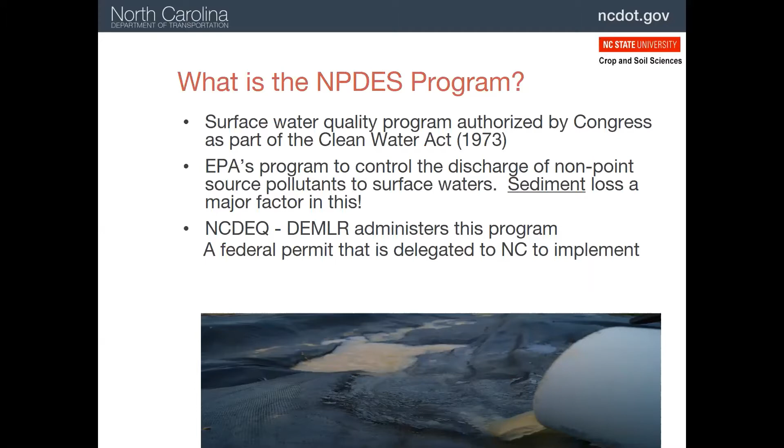The NPDES program is a result of the Clean Water Act of 1973. It directed the U.S. Environmental Protection Agency to control the discharge of pollutants to surface waters, one of which is sediment. This responsibility is given to our Department of Environmental Quality, or DEQ, administered by the Division of Energy, Mining, and Land Resources, or DEMLR.

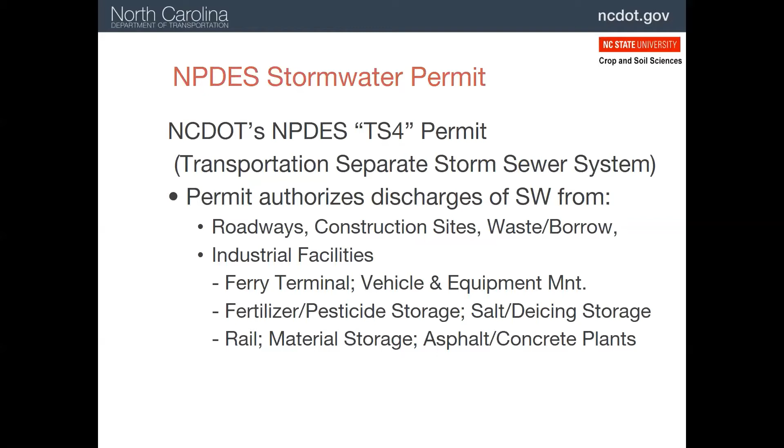The North Carolina Department of Transportation obtains a permit from DEQ that authorizes the discharge of stormwater from all of the following which NCDOT oversees: roadways and their construction, ferries, stored materials, and railroads. This is called the Transportation Separate Storm Sewer System, or TS4. Note, the term sewer is an old one referring to underground pipes, but not necessarily meaning to carry sewage.

The permit requires NCDOT to control potential pollutants through 6 different efforts. One of these is for construction sites, which is the focus of our discussions today.

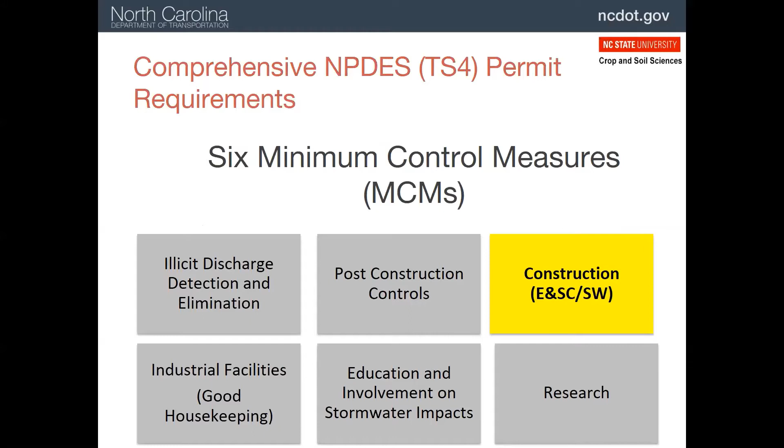There are actually 2 programs that are designed to minimize pollution from construction sites. One is a Construction General Permit, or NCG01, and the other is mandated by the Sedimentation Pollution Control Act, or SPCA. They both are part of the Stormwater Pollution Prevention Plan, often referred to as the SWPPP.

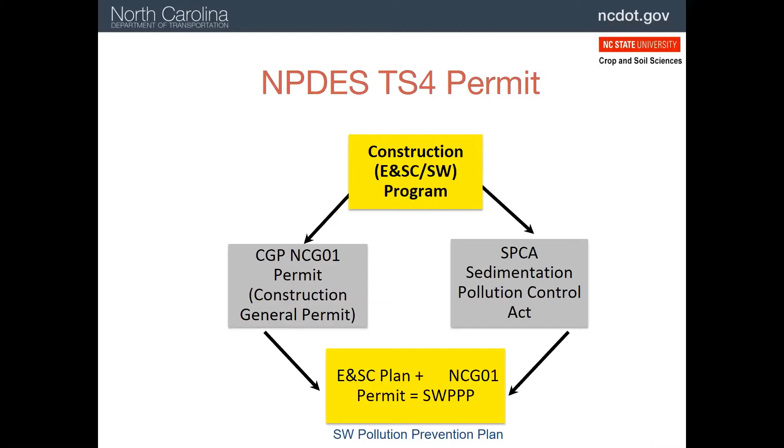There are a number of aspects to the NCG01 permit and the SWPPP, but let's focus on the materials handling and inspections. These are particularly important for Level 2 people.

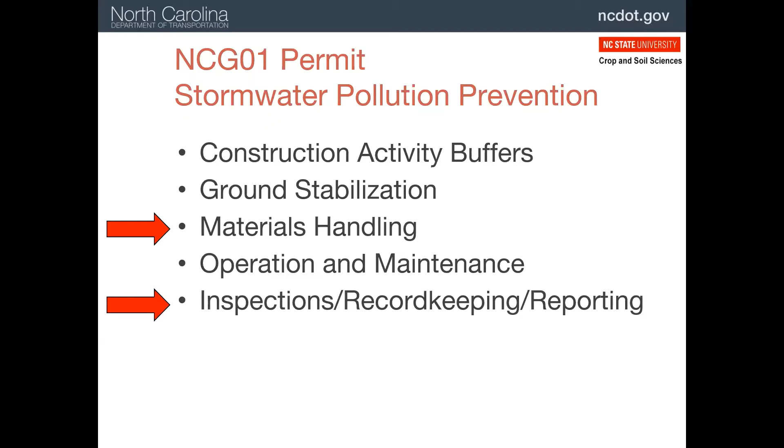Materials is a broad term covering just about everything on the construction site. Remember, we are talking about prevention, or ways to ensure that these do not become pollutants. We'll go through each of these individually.

Flocculants are used to reduce the muddiness or turbidity of runoff, and we'll talk about those in a module, Best Management Practices, later. Some of the important management practices include selecting products that are approved by the state, applying them in the right place and amount, ponding the water after treatment to allow the flocculated sediment to settle, and storing the flocculants correctly.

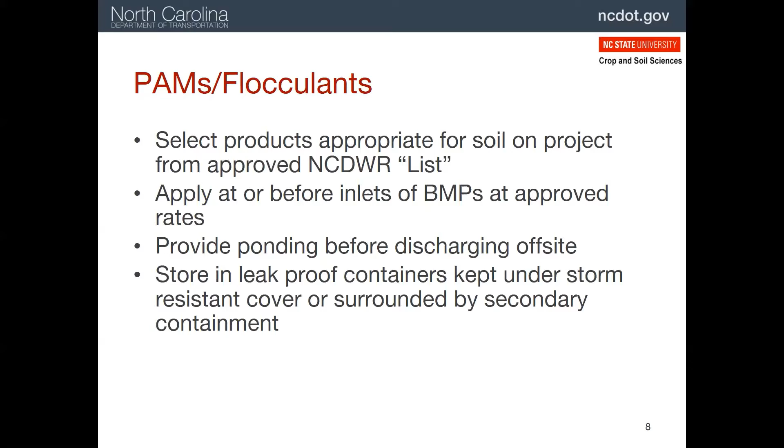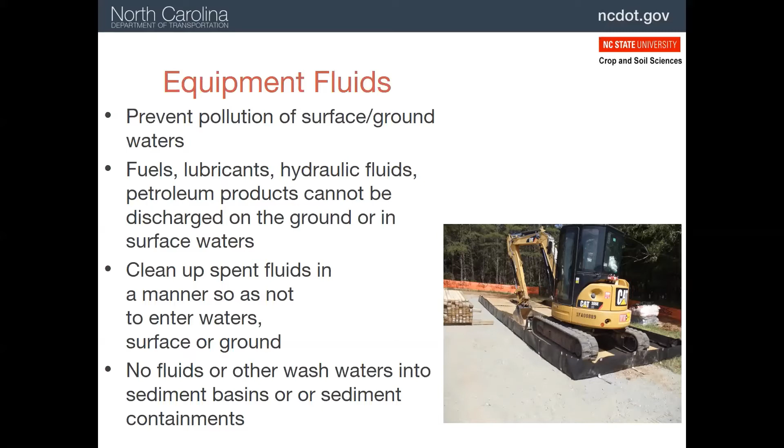Vehicles and equipment involve a great number of fluids, which can be pollutants if they are released. If these are spilled onto the ground, or worse, into the water, the material has to be collected and disposed of properly to avoid discharges off the site. In this picture, a track hoe has been stored on a pad that will contain any leaks that may occur, a good insurance measure.

Waste materials include building materials, paints, solvents, litter, and sanitary waste. All of these have to be stored away from storm drains or surface waters and disposed of properly.

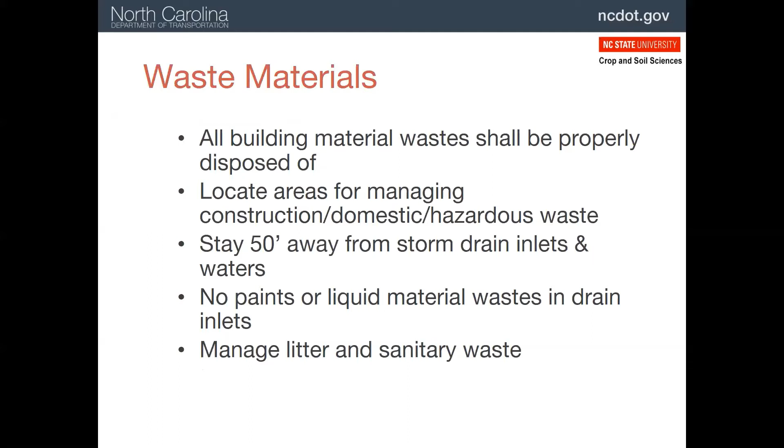Pesticides, which includes a wide variety of products, need to be stored according to state regulations and the label restrictions. They need to be kept in their original container with the label intact. Generally, storage should be far away from potential pollutant pathways such as wells, storm drains, and surface waters. Only the material needed for a particular operation should be on site.

Concrete is a potential pollutant because it is highly alkaline or high in pH before it cures and can be toxic in surface waters. Concrete or cement slurry needs to be contained on the site. Concrete washouts, or concrete truck rinse downs, should be more than 50 feet from storm drains, creeks, ponds, etc. Washouts should be allowed to harden and then disposed of properly.

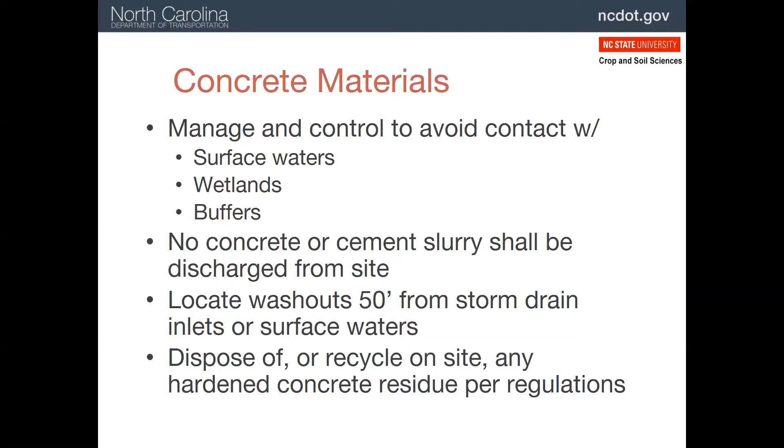This is an example of a concrete washout area. Notice the plastic liner, and that's where the concrete will be washed into and collected and disposed of, usually by burying it.

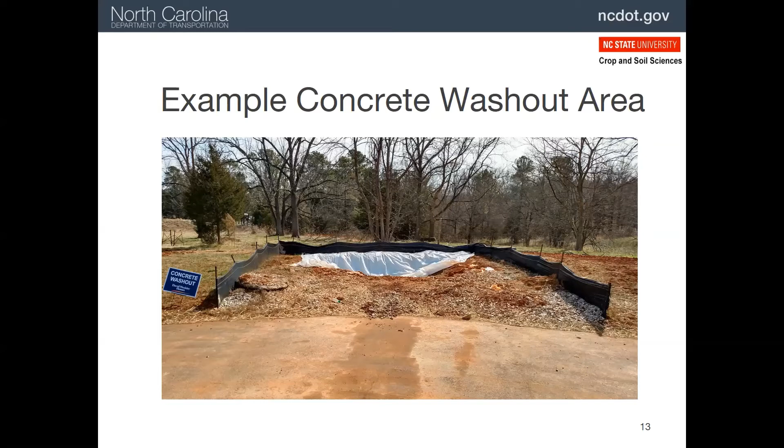Soil can also be a pollutant if it's allowed to get into streams, so soil stockpiles need to be more than 50 feet from storm drains and surface waters. In this picture, the stockpile is actually in direct contact with a stream, a major violation.

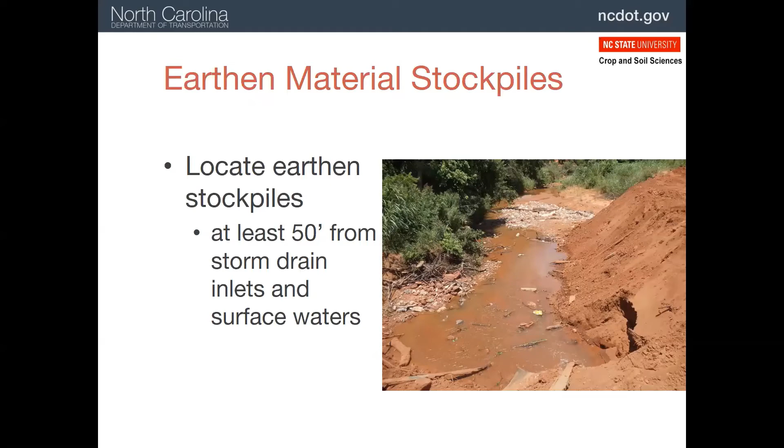Even small amounts of pollutants have to be controlled. In this case, the Level 2 person should stop this operation until the concrete runoff is controlled and prevented from getting into the drain.

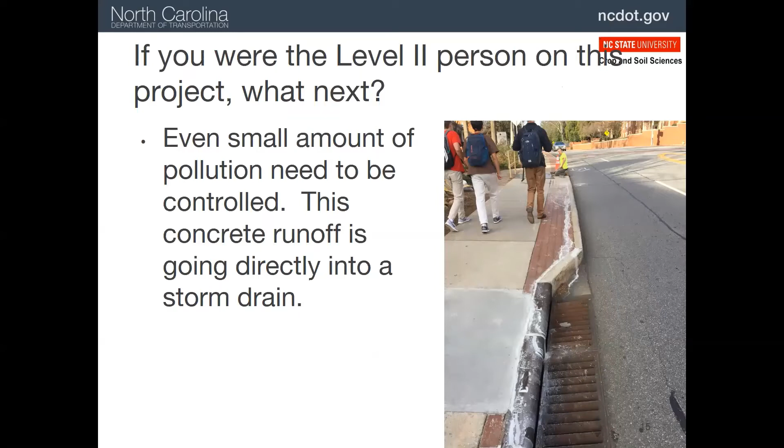Inspections and good records are very important in being in compliance with SWPPP. In fact, if a state or NCDOT inspector arrives on your site, the first thing they will ask for is your inspection record. All erosion and sediment control practices should be inspected once a week or within 24 hours of a 1 inch or greater rain event.

In some areas, the North Carolina Division of Water Resources may require more frequent inspections. This will be on the erosion and sediment control plan. There are exceptions for idle and completed projects, which we'll go over in just a minute. The daily rainfall amount also has to be recorded as well, which we'll review later. Always have these records available for review.

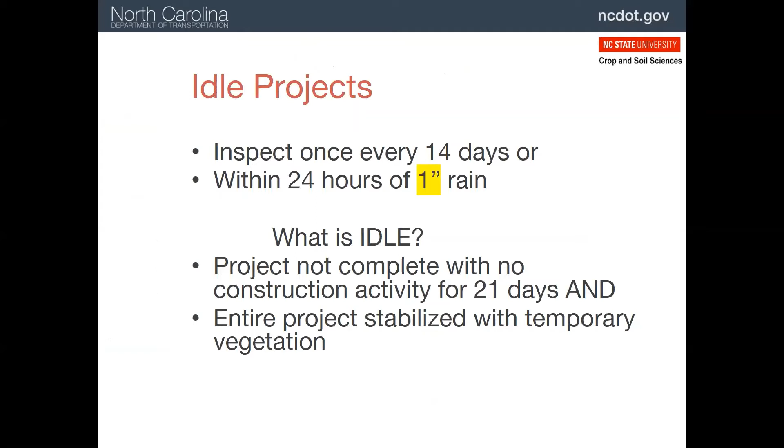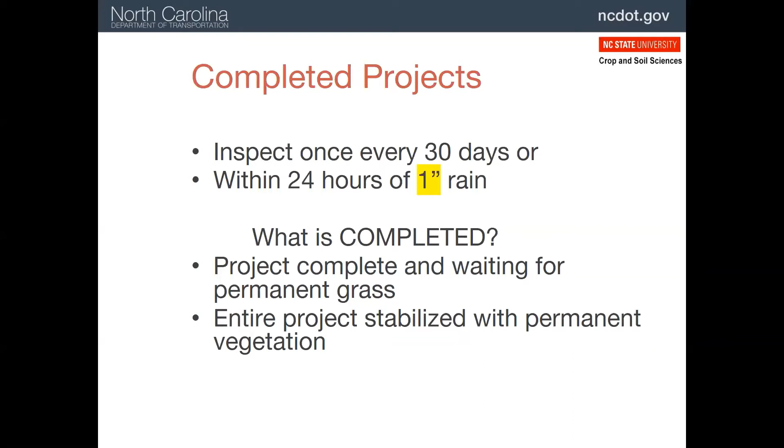Idle projects only have to be inspected every 2 weeks, but also after a 1 inch rain. These are defined as projects with no activity in 21 days and which are stabilized with temporary vegetation. Completed projects only have to be inspected every 30 days or after a 1 inch rain. These are projects which have no further work other than to establish a permanent stand of vegetation.

For the phase of grading record, often there are many phases underway on a project, so each week just note all those that are present.

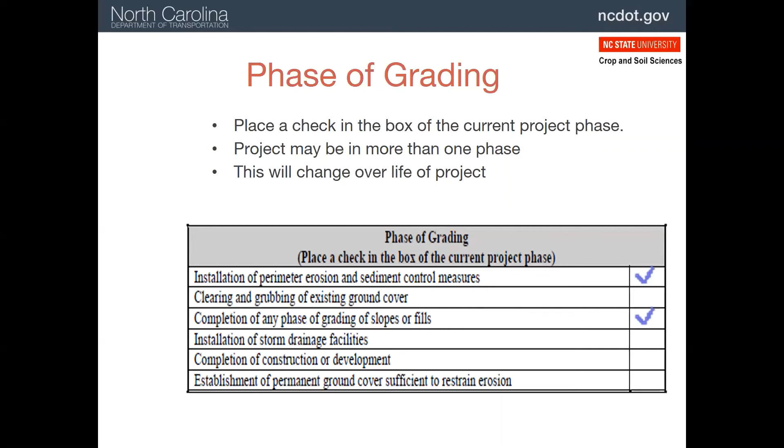For the signatures, both you and the NCDOT representative will sign, but only after the week is complete and any corrective actions are completed. We'll address corrective actions later.

Another form is a record of your inspections of all stormwater discharge outfalls, or SDOs. These are places where runoff leaves the project and discharges into waters of the state. These will be identified on the erosion and sediment control plan. Note that not all discharge points are SDOs.

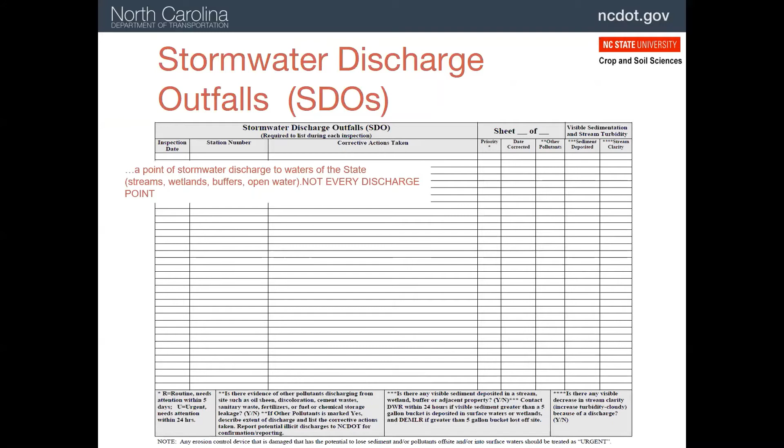On the SDO inspection form, any corrective action should be noted as either routine or urgent, which would correspond to the action required within routine 5 days or urgent 24 hours, respectively. Once corrected, that date should also be noted. The NCDOT representative can overrule the action level.

Note if any sediment has been deposited off the project and how much, such as a 5-gallon bucket or 10-gallon buckets. Both the NCDEQ DEMLR and the Department of Water Resources will have to be notified of all off-site deposits. Also note if surface waters have been muddied by the discharge.

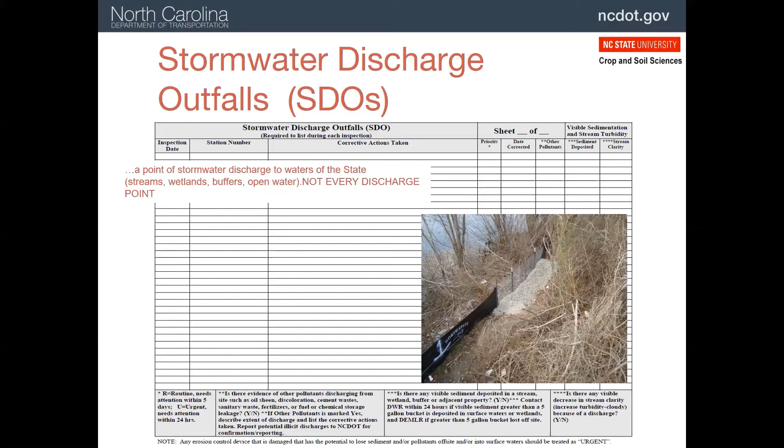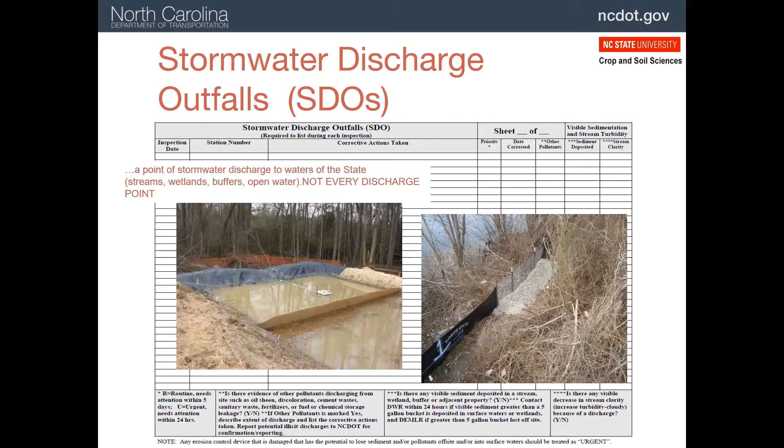As noted, record an R or a U for the action level, the date, and note that the NCDOT person can actually change that from an R to a U if they want.

Sediment deposited: you have to answer yes or no and how much, and you have to notify DEMLR and the Department or Division of Water Resources within 24 hours if it's deposited in surface waters or wetlands. Note how much turbidity there is and if it's increased as a result of this discharge.

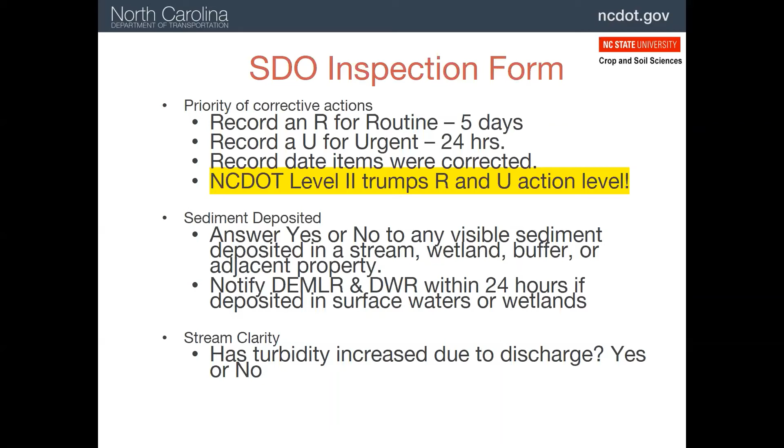To illustrate how an SDO form might be filled out, here's an example. The first issue was with a skimmer basin, where you can see it says repair baffles were knocked down. This was an R because there's little chance this would result in sediment discharges.

The second issue was a silt fence outlet, which is on the edge of the project. This got a U because a failure here could cause sediment to be discharged off the site. The amount of sediment recovered was also noted, less than a 5-gallon bucket by hand. Note that the mark was placed in each box just to show that these items were considered.

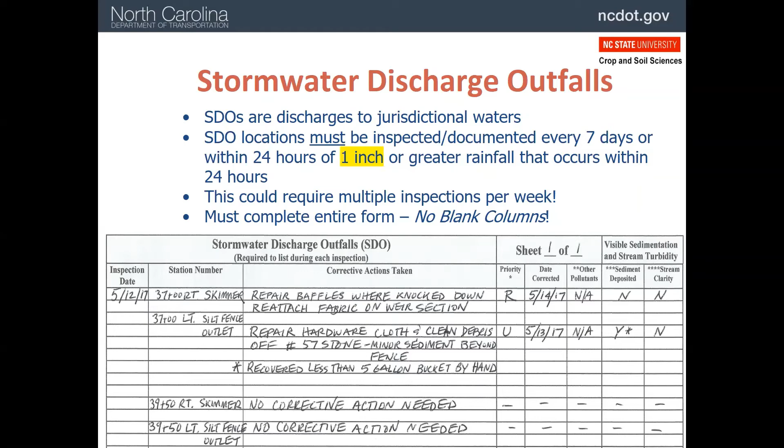Aside from sediment, the inspector should also be looking for other pollutants as well. For instance, if an oily sheen was seen on a wetland outside the project, it might be an oil spill, or it might be just natural. The way to tell is you throw an object into the sheen, and if it breaks apart, it's considered natural. Otherwise, it may be a petroleum product from the project, and it should be addressed just like sediment.

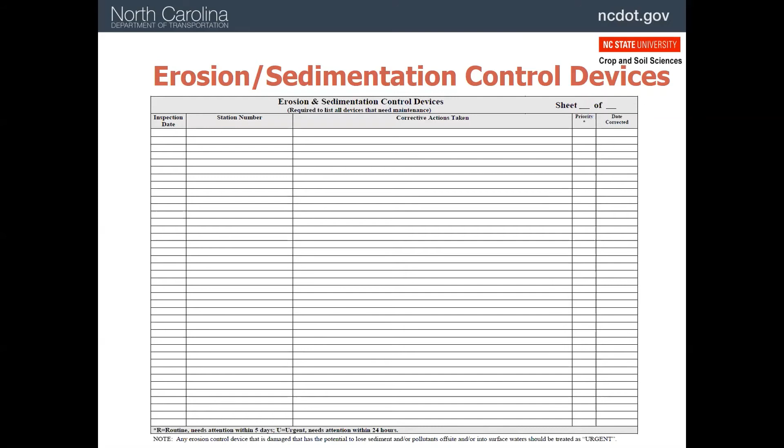All of our erosion and sediment control devices also need to be inspected as well as the SDOs. In this case, however, we only need to note the devices if they need maintenance. So these are some examples of devices that need to be inspected.

This is an example of an inspection form. In each case, the corrective action is noted and the date that it was completed. It's important that you are clear about which ones need attention and where their location is, with the station number. As with stormwater discharge outfalls, priority is given to problems which could result in sediment discharges from the project. The date of the correction will also go on this form.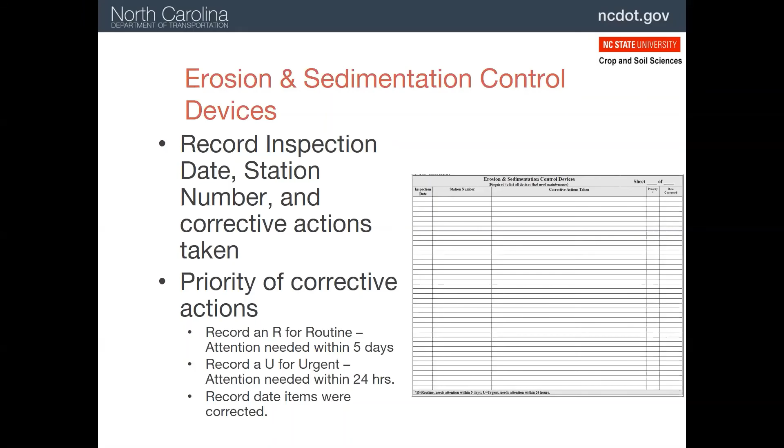This is an example of an inspection form. In each case, the corrective action is noted and the date it was completed. Note that the construction entrance pad, which is supposed to prevent mud from getting tracked onto roads, gets a very high priority. Here's a repair construction entrance pad.

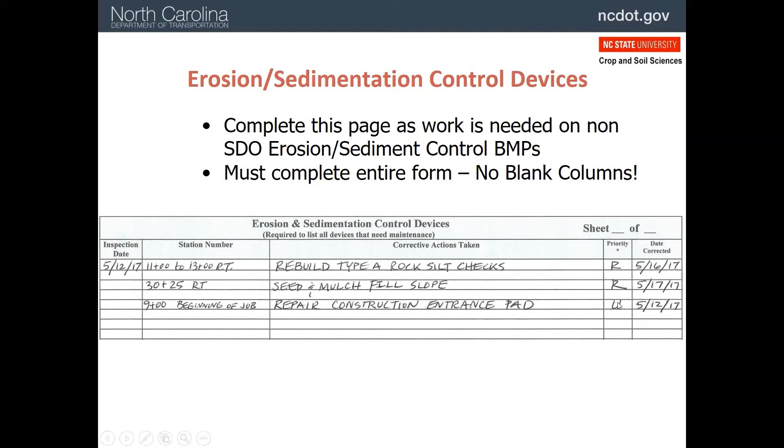Here's a question. Which of these is a stormwater discharge outfall and needs to be recorded on the form? Hopefully everybody agrees that it's where it discharges to state waters, and that should be noted on the plan.

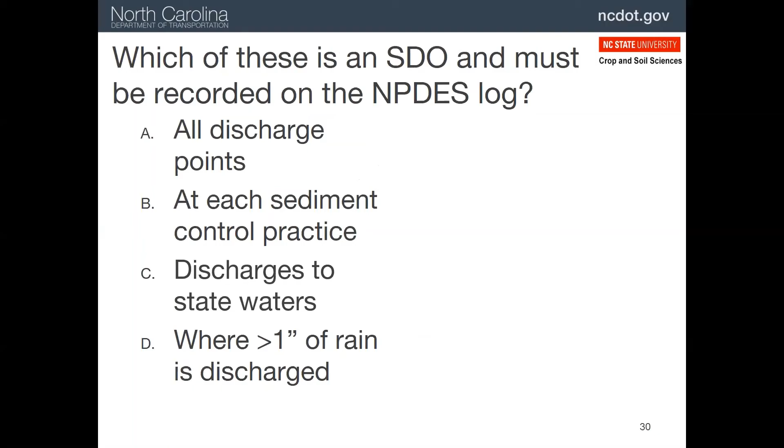There are two options for recording rainfall on a project. One is to use a web-based system developed by the state, which predicts how much rain will fall in any location. The other is to use a rain gauge, which should be in an open area away from trees and structures. Only use one of these options.

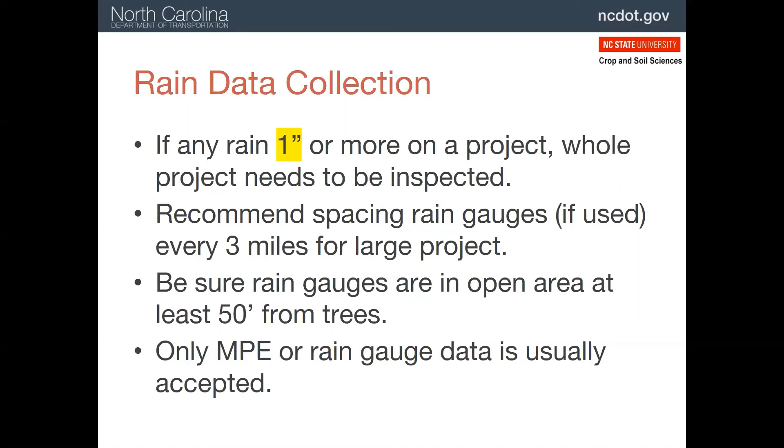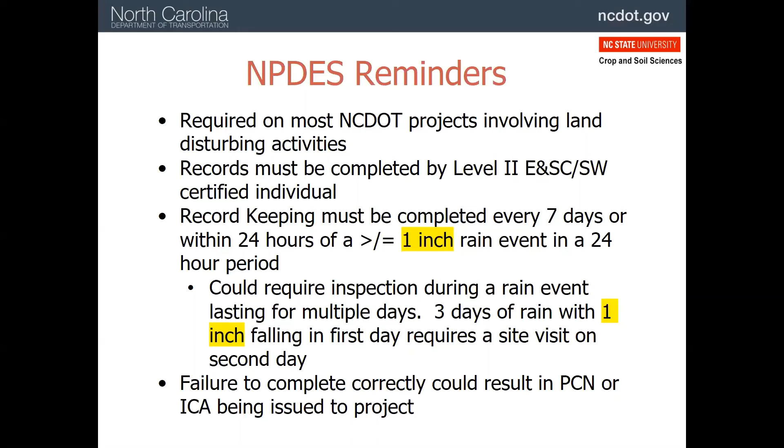A few reminders about record keeping on NCDOT projects. This needs to be done on most land disturbing projects. The Level II certified person is in charge of keeping the records. The form should be completed every 7 days or within a 24-hour period of a 1 inch or greater rainfall. This may mean inspecting during a rain event if it's still raining the day after a 1 inch event. If the forms are not filled out correctly, a violation might be issued.

We're going to go through a simulated inspection to review all that we've just been over. The idea is that you have a printed version of this inspection form and you would fill it out based on the following information, and then we'll review what should have been entered.

So for this week of August 2nd through 8th, we're doing a routine inspection. Grubbing is nearly complete and grading is underway. Erosion and sediment controls are in place. 1 inch of rain occurred on August 2nd and another 0.4 inches on August 7th.

There was a hydraulic fluid leak on August 2nd and a sheen noticed on a sediment basin. The 1 inch rain resulted in runoff bypassing a silt fence and a sediment basin, with sediment in surface water. The baffles in basin 5.3 need repair, and at several locations, temporary silt ditches were installed without their rock check dams.

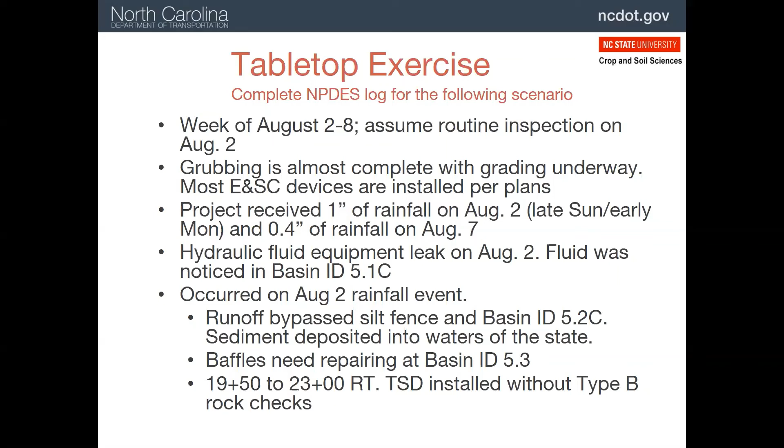Here's an example of an erosion and sediment control plan sheet for this project. It's hard to see at this scale, but the blown-up box shows some of the details related to this inspection.

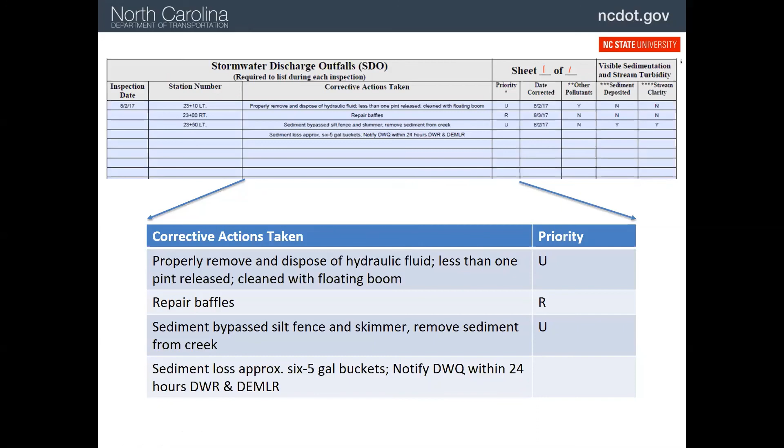Here you can see a blow up of the form with the urgent marking for the hydraulic fluid leak and the urgent marking for the silt fence problems. The problem in the ditch was very simple, just needed to install those check dams to make sure it was not eroding.

So in summary, one suggestion is to do your inspection each Monday, so this captures anything that happened over the weekend. Remember, not all outfalls from the project are considered stormwater discharge outfalls. When filling out inspection forms, be sure that dates of inspection and corrections are included. No blanks on the forms, because we want to ensure the inspection was completed, and then get signatures as soon as the week is done and repairs are completed.

The objective of all this effort is to preserve and protect water quality. That's the end of this module.